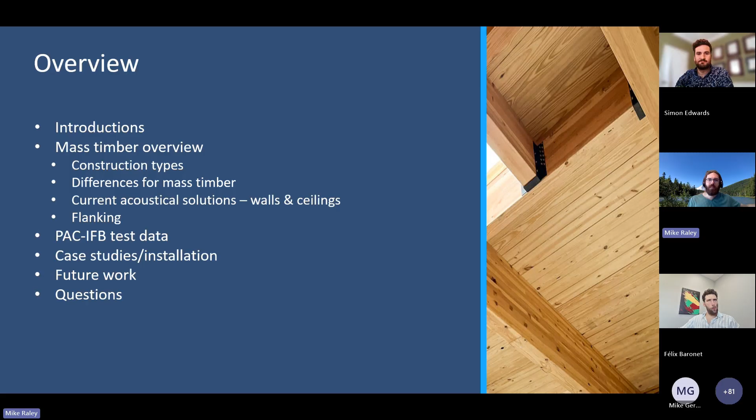So to introduce our two guests, I had some nice headshots that these guys sent us, but when I went to input this, all of the pictures came through except for those two—hopefully you can see them actually up on the camera. So we have Félix Baronet and Simon Edwards joining us today.

Felix is from Acoustic and Simon is from HGC. I'm just going to read their little bios and you guys get to know them a bit more as we talk here too.

Felix holds a bachelor's degree in mechanical engineering from Université Laval and has nearly 5 years of experience in building acoustics, specializing in mass timber. As technical director at Acoustic, he collaborates with multiple partners to develop and optimize acoustic solutions, recently contributing to North America's first on-site IIC tests with HGC and Simon Edwards, our other guest. He's a member of a special interest group with NRC working to integrate legislation on impact noises into the Canadian Building Code.

I think Simon's also a part of that, aren't you, Simon? No, I'm not. Oh no, you're not. There's something you're not a part of in Canadian acoustics? I know, there's only so much you can do.

So that's an NRC working group working on integrating impact noise into the Canadian Building Code. Felix is passionate about turning mass timber's acoustic challenges into opportunities for innovation and sustainable design. Known for his boundless energy and dedication, Felix thrives on pushing limits, whether in the lab, on site until 4 a.m., or in training camps.

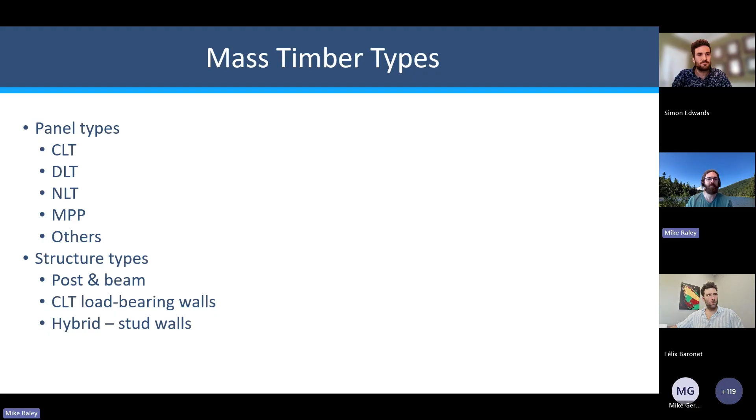So that's kind of what we're tending to see. Now, this is an acoustics presentation, right, we're all acousticians, so let's start talking about that. One of the conceptions is that mass timber is especially tricky for acoustics, right Simon? I'll let you take it from here.

Yeah, sure. As an acoustical consultant, our role, we chat with a lot of architects and developers, and they come to us and say, well, we're not sure we want to use mass timber, we've heard a lot about how mass timber structures are really weak for acoustics. So I find it pretty effective during our presentations to start by validating that. Yes, they are weak for acoustics, that's true. But we also do a lot of work in poured concrete buildings, and we hear all these complaints about footsteps and elevator noise. So poured concrete buildings are also weak for acoustics. But then you hear about all the thumping in lightweight steel frame or lightweight wood frame structures.

So you basically get this situation where all structures are weak for acoustics, except if they're designed properly. That's one of the most important messages I find to communicate when talking about mass timber - yes, it is weak for acoustics. Maybe you've heard of projects that have had complaints, but it's no different than having heard of other projects with complaints that are concrete or lightweight wood frame. At the end of the day, if it's well designed, you shouldn't have complaints. There's no reason you'll have complaints if you go into the project with the right approach and the right design. If you don't, mass timber is going to be no different than any other structure - you might end up having some issues.

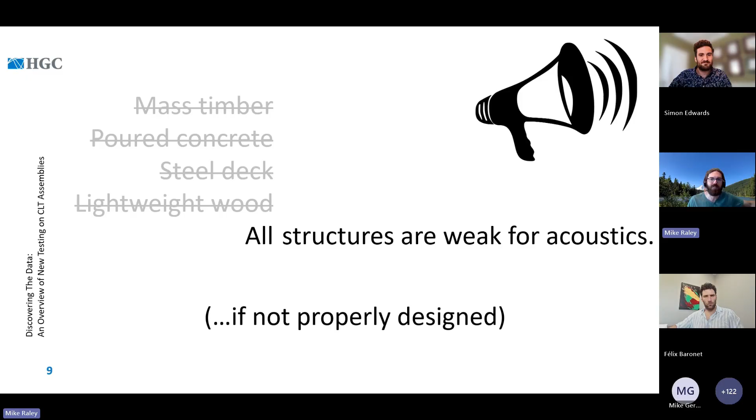Yeah, totally, that makes sense. We've seen lots of lightweight wood framed projects, especially where there's just low mass, low stiffness, and so you tend to have issues there and things like that.

So in terms of those things, some common assembly types - you mentioned concrete. A lot of the concrete projects I've worked on, you've got a 6 or 8 inch concrete slab, and you'll put a thin underlayment and then your flooring on top of that, and that's usually enough to get you to your code minimums. Doesn't necessarily get you to really high levels of performance, but on concrete it can be pretty easy to meet those code minimums.

In lightweight wood frame construction, we often have to do more just because there's so much less weight there, so much less mass. So we're often using a gypsum concrete topping, some finished flooring, maybe another underlayment on that, resilient channel for the ceilings, or sound isolation clips like the PAC RSIC-1, things like that. Maybe even springs if we're going for high levels of sound isolation. But those are all pretty tried and true things - we've been doing these for a long time. Even the RSIC clip's been around for I think 25 years this year. So we've got a lot of test data and a lot of experience with those.

But mass timber, we've got a lot less experience with that. And I think with mass timber, especially compared to concrete, we're starting at a lower baseline. Would you say that's true, Simon, just because of the significantly less mass that we have? If you think of just the basic STC rating, at least with concrete, the concrete slab by itself typically meets your code minimum, so you can kind of take that as a given.

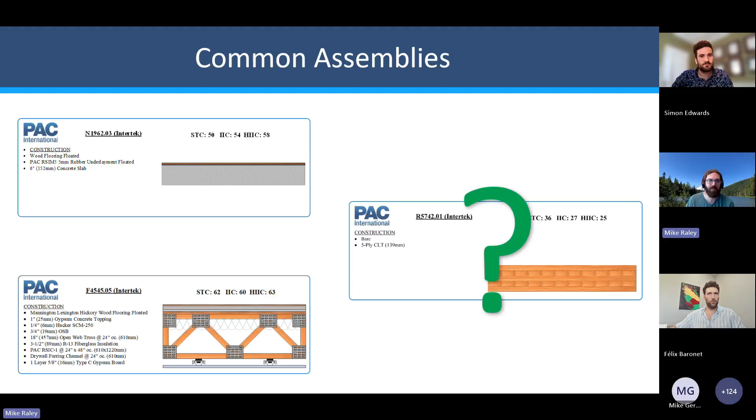Either one of you go. Yeah, Felix touched on it a little bit. Felix, you're muted, so I'll use that as a sign for me to jump in.

Because CLT panels, we're trying to often keep the ceilings exposed if we can. That really means that if we want to do any upgrades to this separation, it has to be above. So basically 100% of mass timber projects, not just CLT, even NLT, will have some type of floating topping. Floating topping means some type of mass above some type of isolation material, like a rubber, for example. You need that basically in order to have decent floor-ceiling direct sound transmission.

And that mass, there are lots of different options there. When you talk about mass, you could be talking about something wet that you pour, like a gypcrete or a concrete. It could be something dry, like plywood or cement board or a Fermacell type of dry solution. So there are different solutions. Then you could go with thickness - you could do 2 layers of plywood or 3 layers of plywood, 2-inch concrete, 3-inch concrete.

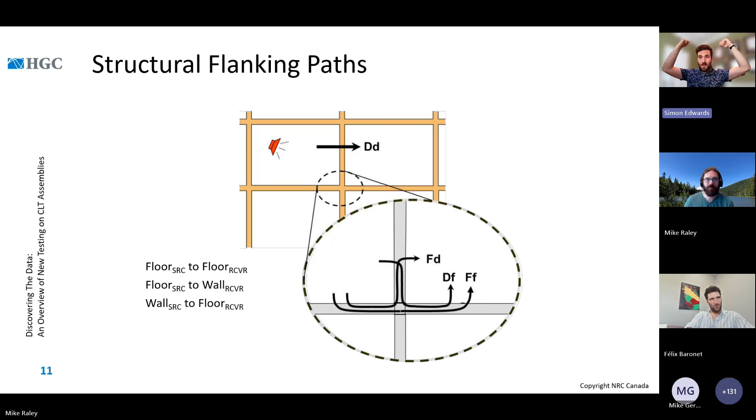So an ASTC is sort of similar to NNIC, and so an ASTC rating of 49 or 48 would really essentially meet those code requirements. That would be okay. And so we have found that you can keep these panels continuous.

But tying back to that original conversation on toppings, not all toppings allow you to keep those panels continuous. Some toppings, if you have a really, really thick isolation material, then your topping won't change how the sound goes through the wood enough. And it will go back to the way it was in the lab, and then you get really low performance in the field.

So that's how we have started thinking about how we can use these toppings, wet toppings, dry toppings, roof toppings. That's another important one, you know. If your top floor units have exposed CLT ceilings, whatever's going on the roof has to also change that structural flanking. So we're kind of thinking about how we can use our floor toppings to address the structural flanking as well.

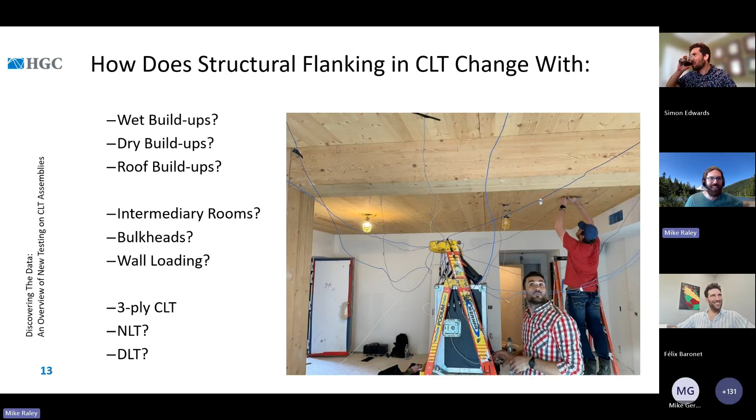You've been kind of digging into this, looking at the flanking across a space. I want to keep us going here to make sure we get those things, but this is an important one too, so I want to talk about it. Could you set the scene for us of what this project was and what you looked at?

Yeah, definitely. I'll give some high level approaches. In addition to addressing structural flanking, which is a big issue in mass timber acoustics, and looking at how the topping can affect that, there are other solutions. Ultimately, you want to reduce the amount of sound getting into your ceiling and then coming off the ceiling in the next apartment over. One way to do that is by putting a drywall ceiling in an intermediary room.

So in this example, you've got your demising wall. Let's say you have a bathroom along the demising wall, and then you can leave your mass timber exposed in the living room or the bedroom, for example. What we've found in some of our testing is that can increase your ASTC by about 5 to 6 points.

So already that's a great solution for people who ask, well, what's the right time to involve an acoustical consultant? When I talk about getting involved as early as possible, I mean the conversations where we decide where are we going to put the bathrooms, where are we going to put the bulkheads. Things like that, taking place so early in a project design, can have a big impact on acoustics without the point being to add more costs.

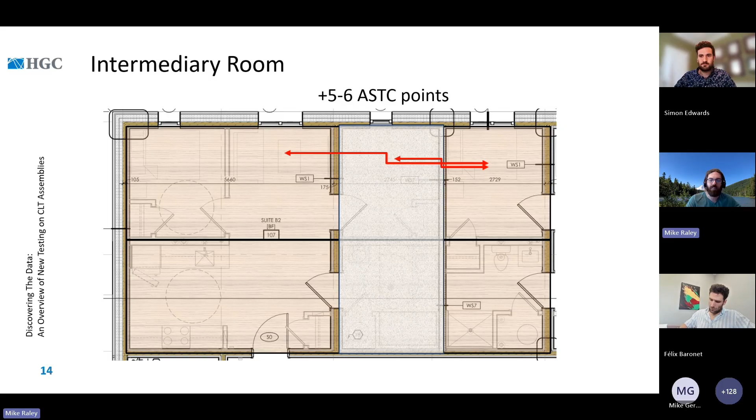But there's also FP Innovations. We've mentioned Woodworks, that's one great resource for a bunch of information on mass timber. They have acoustical assemblies too. FP Innovations does as well, and I didn't get a chance to put it in here, but they have some test data, acoustical test data for CLT assemblies with drywall ceilings, and some even with our RSIC-1 ADM, our clip that's a version of the RSIC-1 you can attach to the ceiling. So there are different ways to easily attach a drywall ceiling and get that performance.

Yeah, so I'll let you talk through these bulkheads, Simon. Yeah, I'll just very briefly add on.

This is some additional testing we did pretty recently, another Acoustic project, so I wanted to make sure these are really interesting data to share. We were looking at, okay, what if we don't want to drywall a whole room, what if we just want to look at bulkheads? This comes into good design decisions early in a project where you have continuous mass timber panels. Can we place our bulkheads at that point? And also getting into the idea of do we need bulkheads or not?

When we talk about how the topping affects the flanking, what we found is that a dry topping, because it's lighter weight, is not as effective at addressing the flanking. Does that mean you can't use dry toppings? That's not what we want as a solution, because there are a lot of benefits to dry toppings as well. So it's more about, okay, if we want to use a dry topping, then what's the solution? We recently did some testing with the Acoustic Sofix dry topping above a 5-ply

7-inch CLT. We tested between two adjacent bedrooms where we had no bulkheads, one bulkhead meaning only on one side, or two bulkheads, a bulkhead on two sides. And the data was really, really interesting.

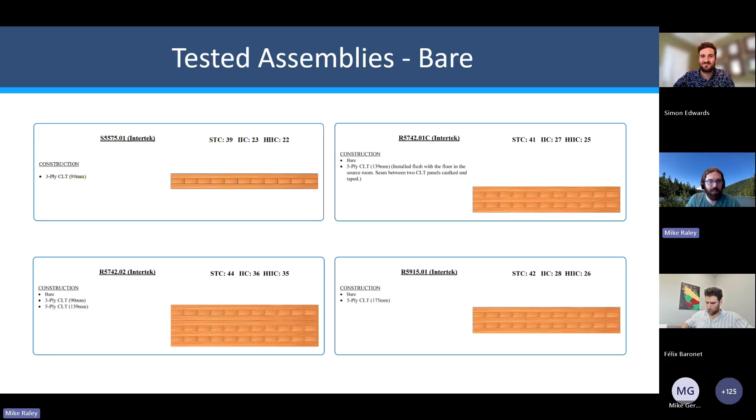You can see fairly low ratings for both STC and IIC. But as you start adding these dry toppings, immediately your STC and IIC ratings improve significantly, and these are all pretty much the same kind of buildup—same isolators. It's the PAC IFB, a 2-inch by 2-inch polyurethane foam isolator that you can space at maybe 16 or 24 inches on center. We'll show some installation photos of that later.

The subfloor is usually two layers of 3/4 inch plywood, with some insulation in the cavity. So this dry topping is fairly quick and easy to put together, but you can get really good numbers—this is just bare plywood. When you add a finished floor onto this, you get even better numbers. These are STC ratings in the high 50s, low 60s, and IIC ratings also in the high 50s, low 60s. So you can get really good ratings, far above just the code minimums.

You still have to consider flanking paths and those kinds of things, like Simon talked about, but now you've got some tools and resources for those as well. Just to dig into this, and for some comparisons—to Simon's point, there's this idea that mass timber is weak, but really all construction types have their weaknesses for acoustics. So on the left we have floating floors on mass timber, and on the right we have floating floors using the same PAC IFB and two layers of 3/4 inch plywood on concrete.

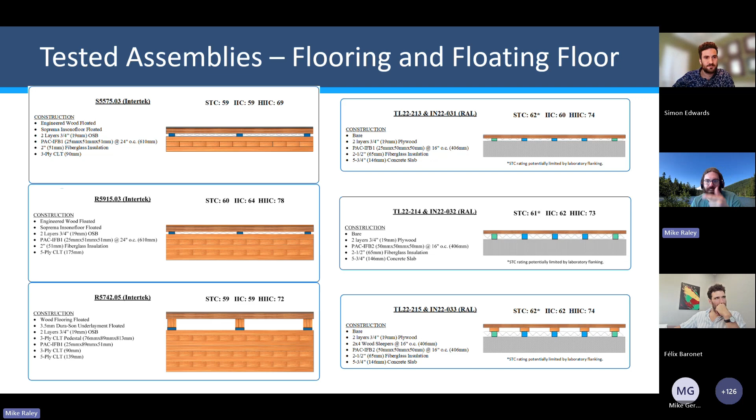That's awesome. And that was all data that was available to you where you could go access it, and I think there's a link for that now in the assembly selector.

So I'm going to go through a bunch of data now. This is the kind of data-heavy portion of this, but I'll go through these relatively quickly and just point out a few things. Again, all this data is online and you can dig through it.

So here we have just the basic transmission loss values. Just to orient everybody who's not necessarily familiar with looking at these, on the x-axis, or horizontal axis, we have frequency, going from low frequency on the left, like bass notes, booms and things, to high frequencies on the right, like clicks and clacks, high pitched sounds. On the vertical axis, the y-axis, we have the transmission loss value - basically how much the assembly reduces the noise going from one side to the other for airborne noise. So higher numbers are better.

So here's the two 5-ply assemblies, and I present this just to show that there is a difference in these assemblies. Different manufacturers will have different thicknesses of 5-plies, they'll use different wood. There's also just inherently some variation in tests - even if you test the same assembly or the same general 5-ply from the same manufacturer, you will see some differences. So if you see small differences, 3 points or less, especially in acoustical test results when comparing them, even in the same lab, take it with a grain of salt. There is some variability in these things.

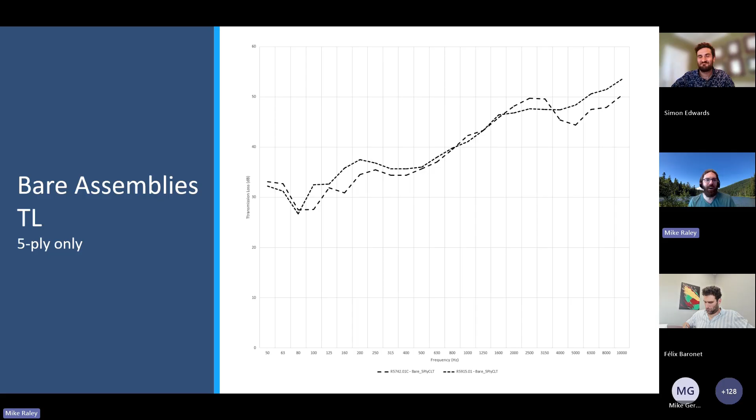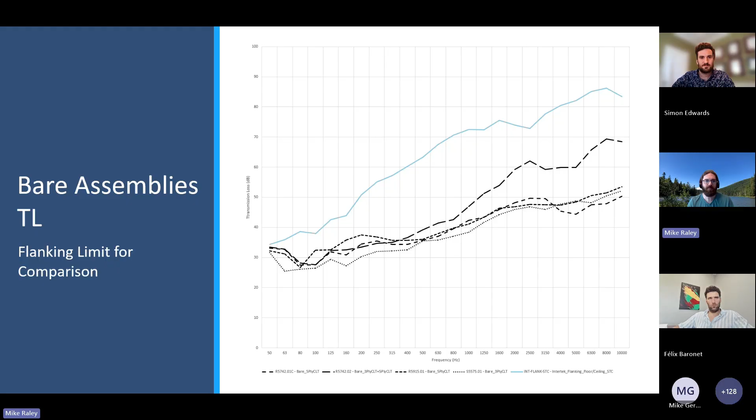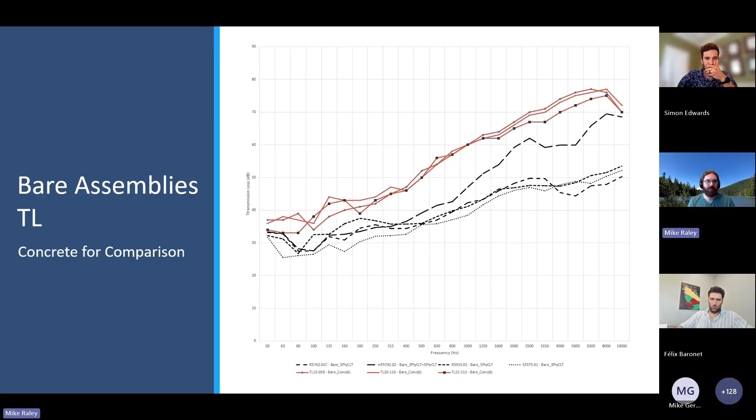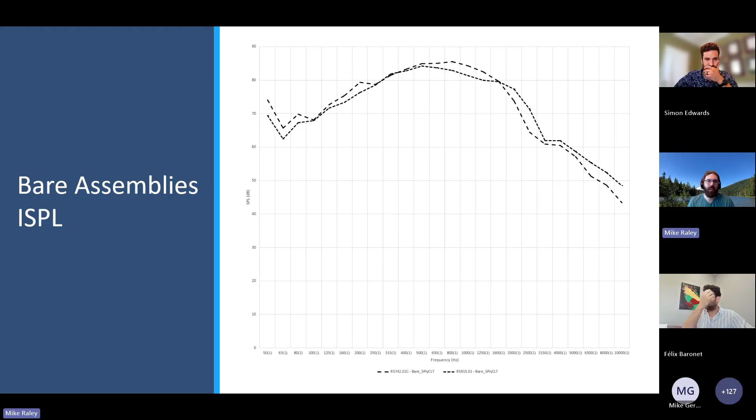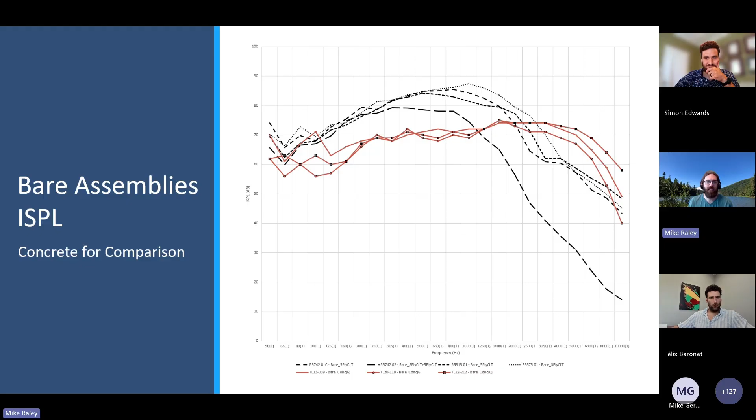And again, we've got some variation with concrete slabs - the same basic slab tested at the same lab, just different times, different years. You can see, especially at low frequencies, there's a huge amount of variation there.

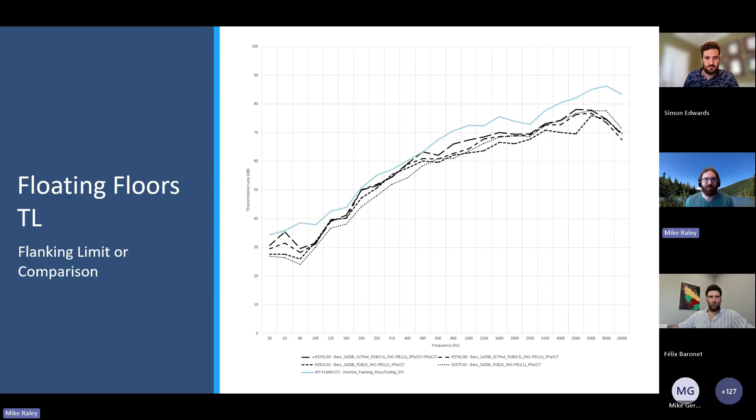So in this particular instance, even just adding the floating floor with the PAC-IFB - two layers of OSB and the IFB - to a 3-ply CLT got it close to the maximum that the lab could measure. We're getting into this high STC 50, low STC 60 range. There's some chance that in a lab with a higher flanking limit, these might get even slightly higher transmission loss values than this. But it shows just the level of performance you can achieve even with a relatively lightweight dry buildup.

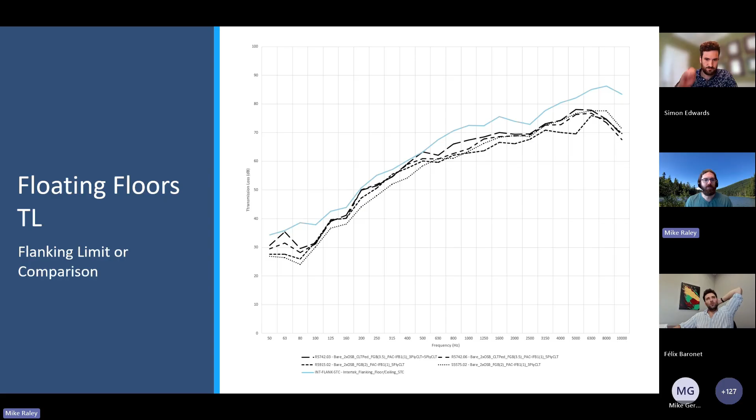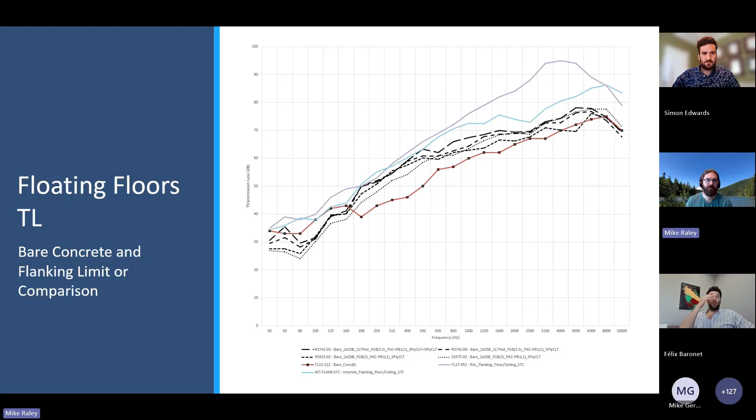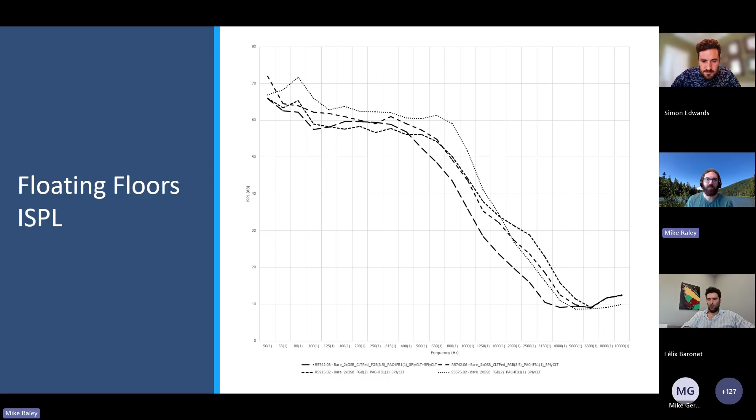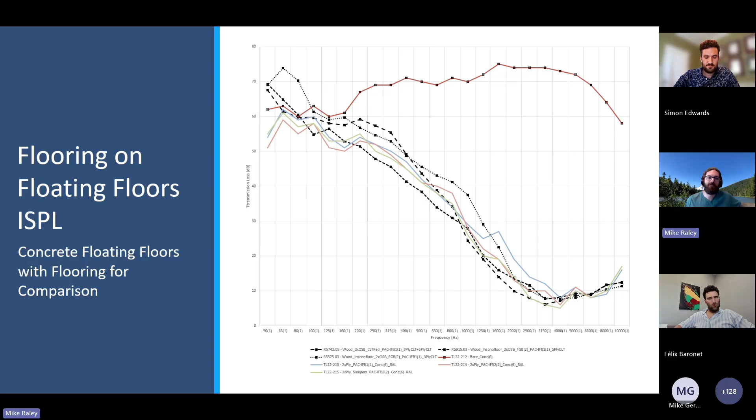And this is the floating floor with the pack IFBs with an engineered wood floor, I think actually on an Insonofloor, which is a product from Acoustic and Soprema. With that, you can get similar things to even floating floors on concrete. So you can start to get high performance levels of sound isolation on these kinds of assemblies.

And then the other interesting thing here is, like we've been talking about, there's a lot of variation in mass timber, right? You've got 5-ply CLTs, 3-ply CLTs, CLTs from different manufacturers, DLTs and NLTs, which there's less data on, mass plywood panels, and these kinds of things. So what do you do if you've got some project with a new kind of mass timber structural system, and you're looking at what kind of results for acoustical performance am I going to get on it, but you can't find any or much test data for it?

So I realized that I had tested the exact same basic floating floor buildup, a couple layers of plywood on the PAC-IFB, on 4 different mass timber assemblies. I wanted to see, did I get consistent improvements from that floating floor that would then allow me to go and predict on other assemblies.

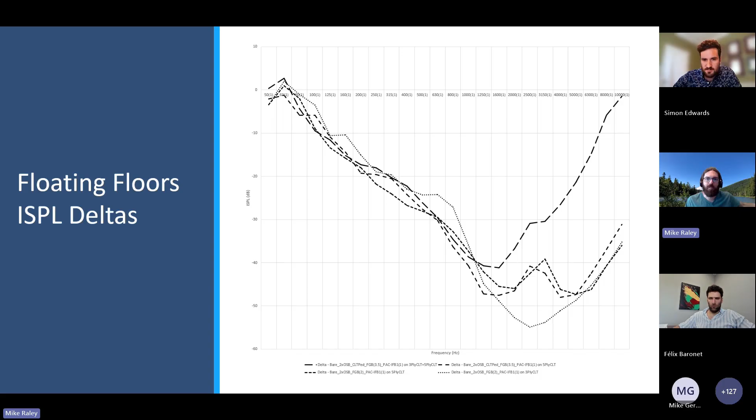So here what you have is the deltas, the change in the impact sound pressure level of the assembly when you add the floating floor to the bare CLT panel. This is for the 3-ply, the two 5-plies, and the 5-ply plus the 5-ply. You can see from, I can't quite see the frequency range, but maybe from 1,000 hertz or a bit above that down, they're all very similar. And interestingly, even if you add concrete, because I've tested the same floating floor buildup on concrete, that's the orange line, even in that fairly wide frequency range, the deltas are the same.

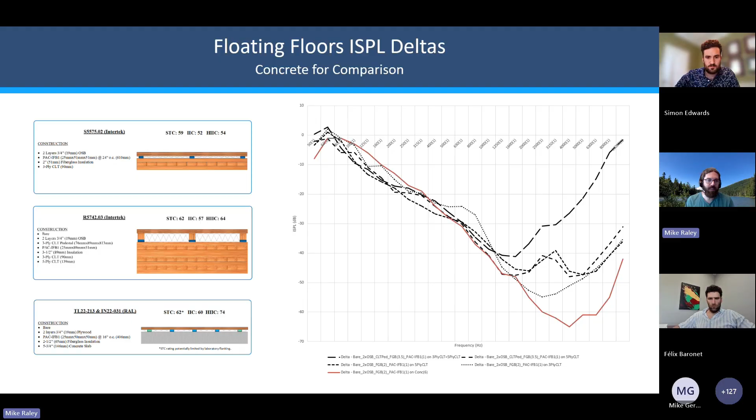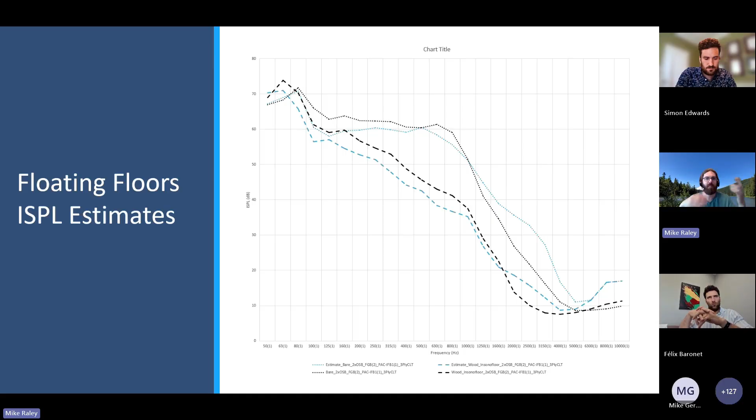So what this indicates to me is that you can use these deltas, this change in your impact sound pressure levels, to predict what this floating floor might give you on other assemblies if you just have the bare assembly test data. So I went and tried that out, and here's the comparison between the black and the blue lines, and you can actually get pretty close in your predictions. This shows you can take this data and do predictions for other projects, because this keeps changing quite a bit. So that's all of that.

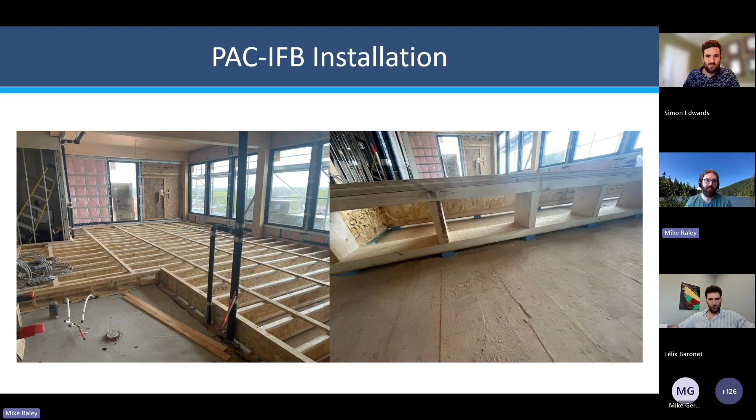And then I'm going to go, just in the interest of time, to this other project, because this is the one that Simon mentioned. This is that project where they had this riser system to level it, you can see there the door in the back. I think that was the outdoor amenity space, and so they did this, and you can see here the IFBs underneath this, and here's the installation of where we did this.

So we did a layout for these with Ty, our CAD draftsperson. We got from Simon and Felix exactly where the structural elements, these joists, were going to be, and then we lined up the isolators with those to put them in here.

Have you had a chance, or are you going to have a chance, to do field tests on this project? We've done some field testing on this project, but it wasn't ready for field testing on this floor. This is the top floor of the building, so we're actually going back tomorrow to do some testing. Oh, dang it, we should have pushed this presentation back about 48 hours so we could have the data.

Is that something you might present in the future at an ASA session or something like that? Yeah, it'd be cool. We'll take a look at the data and we can definitely chat about where to go from there.

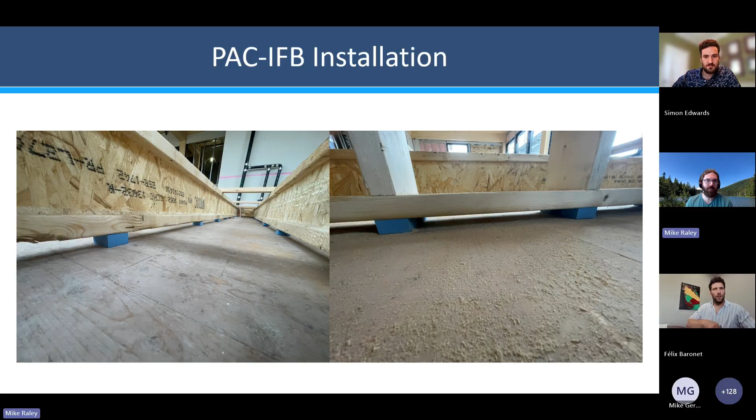So real fast, since we're getting close on time, I just want to give you a minute or two, Simon, to talk about this study you're doing. Yeah, I'll keep it simple.

We spoke about CLT flanking through continuous panels, so one of our main goals is to not require designers to cut the panels at the demising wall. So we're coming up with more and more ways to keep the panels continuous.

We want to better understand what happens when you go from concrete to a dry topping, or from 2 inches of concrete to 3 inches, or from a 1/2 inch drywall or 1/2 inch isolation to a 1 inch isolation, and what happens when you go from load bearing walls to non-load bearing walls.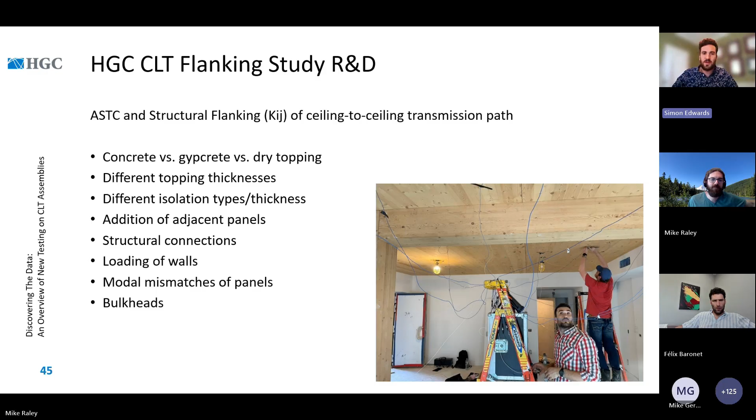We're looking at doing probably 70 to 80 tests of totally different toppings, one after the other, as you can see on this list, playing around with all of these different materials and manufacturers, and making this data public.

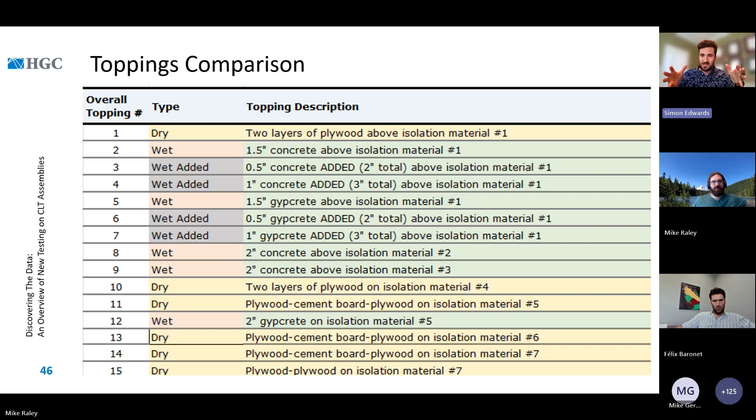We're partnering with a lot of fantastic people. The mock-up is going to look something like this, with 2 rooms with continuous panels. We want to test the structural flanking with all of these different toppings above, as well as the direct sound transmission through those toppings, and make all of that data public.

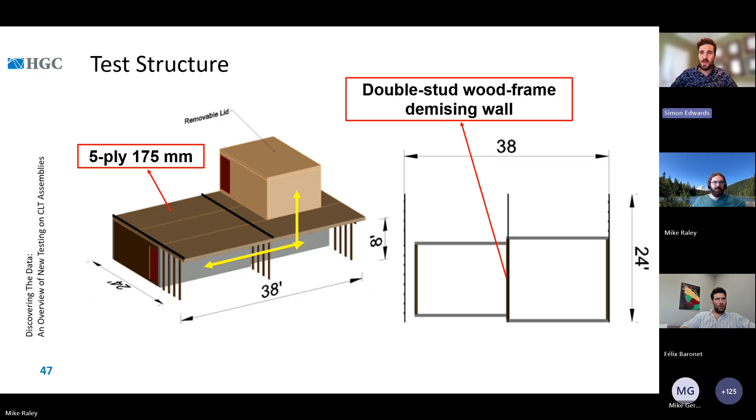We're doing this testing with University of Northern British Columbia as our main partner. We're also partnering with Woodworks, Element 5, Forestry Innovation Investment, Canadian Wood Council, National Council of Acoustical Consultants, Forest Products Lab, Aspect Engineers, and some great manufacturers who've joined us and are willing to contribute their products and be part of this research, including PAC, Acoustic, and Suprema.

We've applied for some pretty significant grants that we're actually expecting to hear back from within a month. Timeline-wise, I'll release more updates as we get info on these grants, but we're probably looking at publishing results in Q3-ish of next year, Q3, Q4.

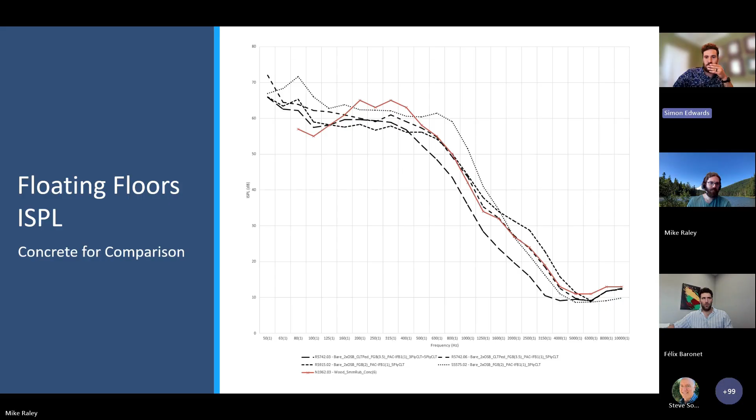No, it was not isolated, but it was insulated. Let's get back to that slide - here, like this. So it was insulated, but not isolated. Slide 16, or 15, it doesn't matter, it's the bulkhead picture. So it was not isolated, just typical steel framing attached directly to the structure.

So do you think isolating that would have given even better performance, or was the main transmission path still through the CLT? You just made the sound take a longer path, that's exactly right. I don't think isolating the bulkheads would have a specific role in this.

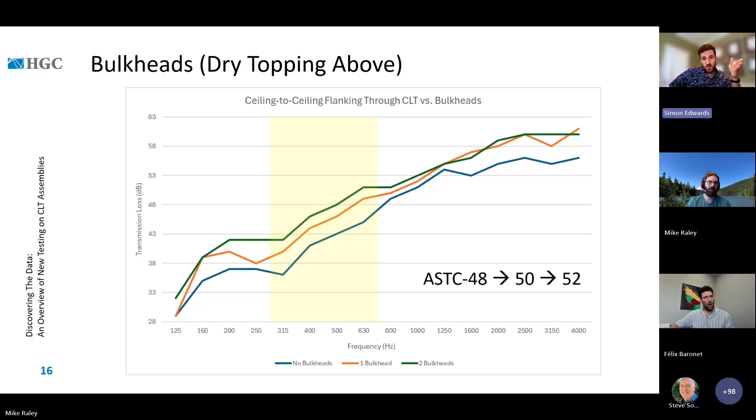How wide were your bulkheads? That's also relevant, that's a good question. These ones were about a foot wide on each side. But hypothetically, if you had a 2 feet wide or 3 feet wide bulkhead, that would have similar effects, because it's really the distance the sound has to travel through the CLT panel. The longer that distance is, the more dissipation you're getting as the sound travels through. That's exactly right. So that's another tool people could play with.

Is that something in your flanking studies that you're going to do? Are you going to play with different sizes? Yep, awesome, cool, all right.

On the same subject of bulkheads, Dan Beckman wrote: can we talk about the bulkheads again? Do you have an idea about the mechanism providing the improvement the bulkheads apparently provide? It seems like you're just closing up the wall ceiling seal itself. Is the flanking still passing through the joint rather than entering the ceiling slab and then exiting it?

I'd say, assuming the wall is already well sealed - and if you got an ASTC 48 in this case, then that wall was already well sealed to the structure, you weren't getting leaks. So by adding these bulkheads, you weren't covering up leaks, you were increasing the distance the sound had to travel through the CLT panel to get from one side to the other, so there was some dissipation there.

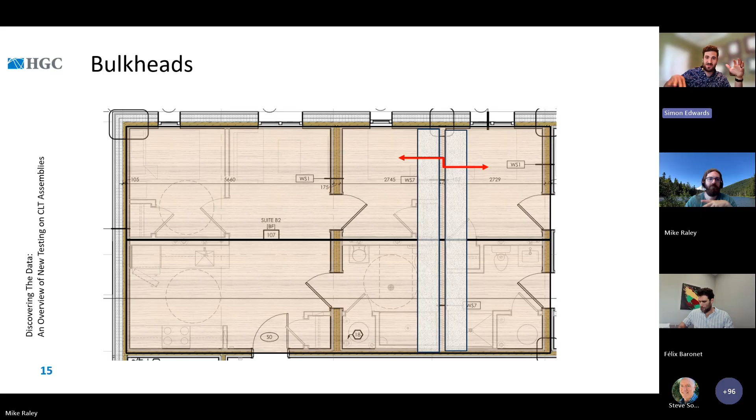Okay, Steve, what else? Ben Toes also asked, you talked a little bit about flanking in testing from the underside, but could you talk about flanking through floating topping assemblies? Do you typically see wall framing remain on top of the topping, or going down to the base timber panels below?

That's a good question. Simon and Felix, what have you typically seen, either when you have a wet topping or when you have a dry topping, like where are those walls placed? And I guess let's also differentiate between load-bearing and non-load-bearing walls.